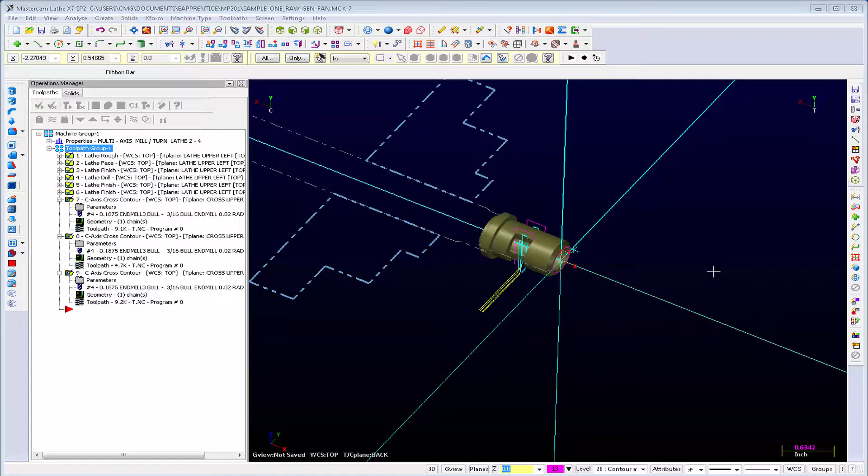In order for this to work, you have to have a post that is set up with the correct post blocks and has the pick-off, cut-off utility enabled. There are some certain options to do that.

My recommendation is that you take the Generic Fanuc 4X MT lathe post and start with that post and customize it if you want to customize a post that uses POCO, because there are just too many things. I mean, you could certainly take some customized post you already have and go through the process of picking out what you need, but there's a lot of structure that's there with command variables and some other stuff that you have to know about how MP works to get it to work in your post.

I know that, for example, this sample part came from one of the students in the class, Josh. I don't think he's here today.

But this particular machine is a Mori, and he was trying to get MP Master to work with his machine. And there were just a couple things that he couldn't really overcome because it wasn't set up the way that our normal generic Fanuc 4X MT lathe post is set up to process the information. And that's really the key. What we're talking about here is using pick-off, cut-off. So let's go through it and talk about it as we do it.

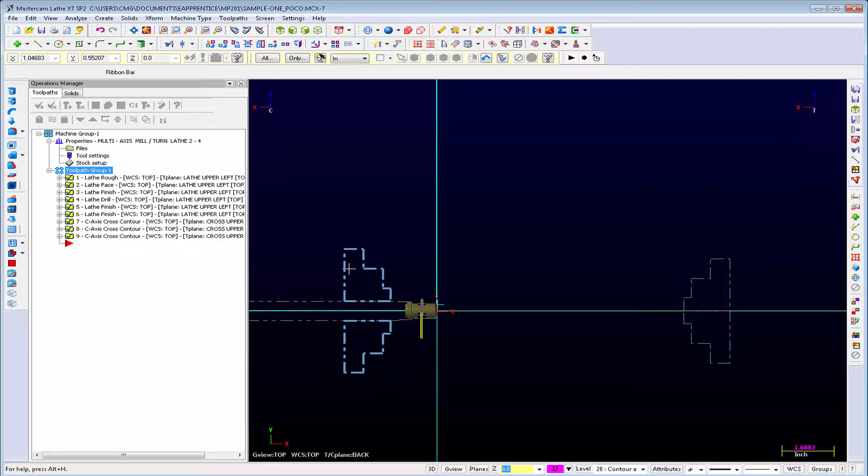In order for pick-off, cut-off to work right from the get-go, you've got to have in your stock setup one piece of stock, either in the left or in the right spindle. You cannot have stock in both. And it's best if you're picking off from the left to the right. There are just more options.

For example, we don't support a bar puller on the right spindle, simply because that's just not the way that most machines are set up. If you've got a bar puller, it's going to be on the left, and your movable spindle is typically on the right. Okay, we have chuck jaws defined on the left, chuck jaws defined on the right, and they're both displayed. Right chuck, left chuck, right stock is turned on even though no stock is defined, and that's perfectly okay.

My point here is that if you have a machine definition that does not have a right spindle or has two pieces of stock defined, one in each chuck, POCO is not going to work. Okay, so here we're starting off and the stock is in the left spindle, and one of the things you can see here on my screen is that the left spindle chuck is shown in a bold line, a really thick line, and the right spindle is shown in a thin line. This is basically showing you the active chuck.

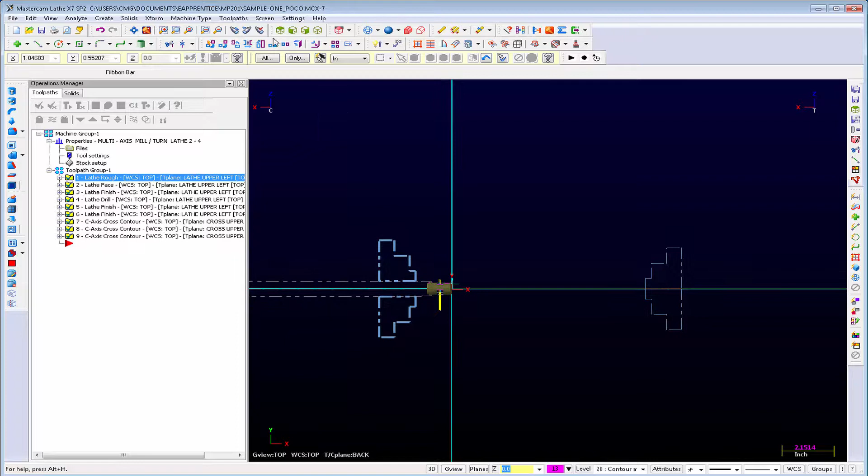All right, so once we start cutting over on the right, you'll notice that that one will be a solid color as well. So here what we're going to do is Toolpaths, Misc Ops, Pick Off, Pull, Cut Off. Now before I click on that, let's study this menu for a minute.

We have at the top pick off, pull, cut off, which is the POCO utility. POCO is just our acronym for it, because it's a pain to say pick off, pull, cut off every time. So the POCO utility is a dialog that walks you through creating a series of chuck operations.

You can move the chuck, you can open the chuck, you can close the chuck, and you can set options. There are some other MISC ops. We have stock transfer, stock flip, stock advance. These are what are known as standalone operations.

So if you do this stock transfer, instead of getting a series of chuck operations, like over here in our ops manager, we have a series of 9 toolpath operations. Pick off, pull, cut off will create a series of tool change, chuck operations, chuck movement operations, cutoff operations if there's a cutoff involved. But basically it generates operations in the operations manager to show the entire process of moving this chuck over, gripping the stock, pulling it out, cutting it off, clamping, unclamping, the whole 9 yards.

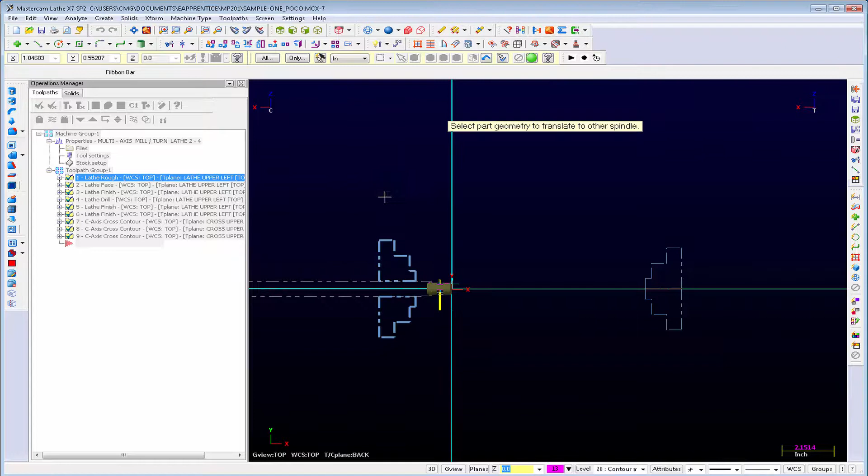So let's walk through the process here. We're going to do the whole shebang. We're going to do pick off, bar pull, cut off. First step here is to select geometry. So I'm going to go into the geometry and I'm going to select the whole thing here. Not only am I going to do a copy of the solid, but we're going to do a copy of all the wireframe as well. So I'll select that as the part geometry that I want to translate to the other spindle.

I'm going to turn on translate geometry. Translate geometry means I'm going to make a copy of it. I'm going to offset all the levels by 1000. So that means all the levels where I had geometry are just all going to be incremented by 1000. We're going to create some views over on the pick-off spindle. What this does is create planes for us.

All right, we're going to create named view. Instead of pick-off spindle, we're going to call this sub-spindle view. Or how about just sub-spindle? And if we want to, we can be specific. We're going to use this for a work offset or something. Sub-spindle G55. Do we want it on the left face of the part or the right face of the part when this part is now in the sub-spindle? Well, that's up to you. Where are you going to set your origin? How are you going to set your origin?

Toolpaths, misc ops, pick off, pull, cut off. What we're doing here is choosing a strategy from the different operations. We can program pick off, bar pull, cut off operations, just pick off, cut off if we don't want to do any stock pulling, simple pick off operation where we're coming over with a piece of stock that's already been cut to length, and we can do bar pull type operations with or without retracting the sub spindle after the bar pull.

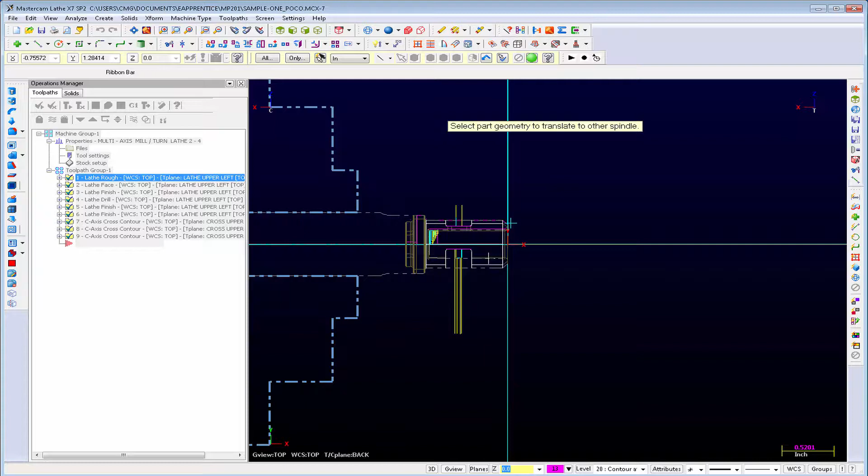So first step in programming one of these types of POCO operations is selecting the geometry. So I'm going to select this solid and that wireframe and select end selection here. And I'm going to choose the option to translate geometry. We're going to choose to translate this and offset it by 1000. All right, so now we're going to say we're going to translate the geometry. We're going to offset all of the geometry's levels by 1000. Basically, it's going to make copies of everything that are offset by increments of 1000.

We're going to tell it we want to create a new plane, a new view for our sub-spindle. And in this case, we're going to use this to set a work offset. We can choose whether we want this generated plane to be on the right face of the part that is now pressed against the sub spindle or some stop, or whether we want it to be on the left face of the part. Depends on how you set your machine. We generally want to tell it to generate pick off spindle stock, because this is going to create a piece of stock, lathe stock, like we see over here.

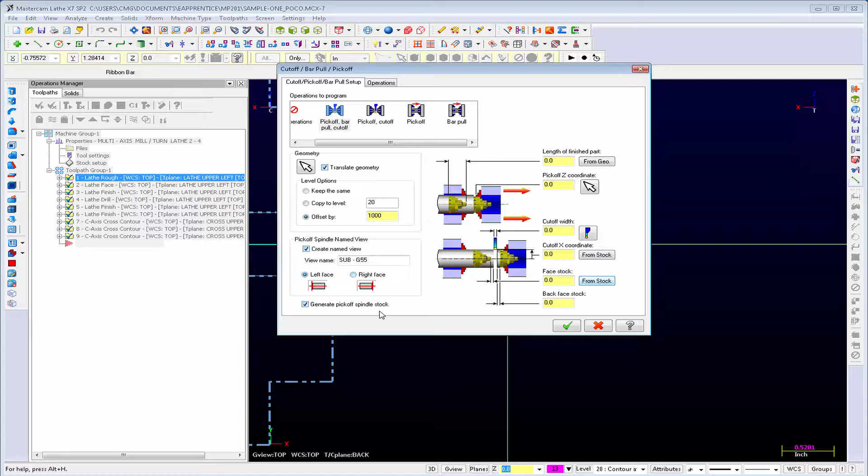And that stock can then be used for stock recognition for your lathe turning operations on the sub-spindle. Now we need to supply some information to the utility. What's the length of our finished part? We can select from geometry, but that's going to include all the geometry here.

What we may want to do is actually go back and click on the geometry button and just grab the solid. Okay, and if we do that and then say from geometry, oh, it did pick that up. Okay. Well, hopefully that is the length of the finished part. We'll find out in a bit.

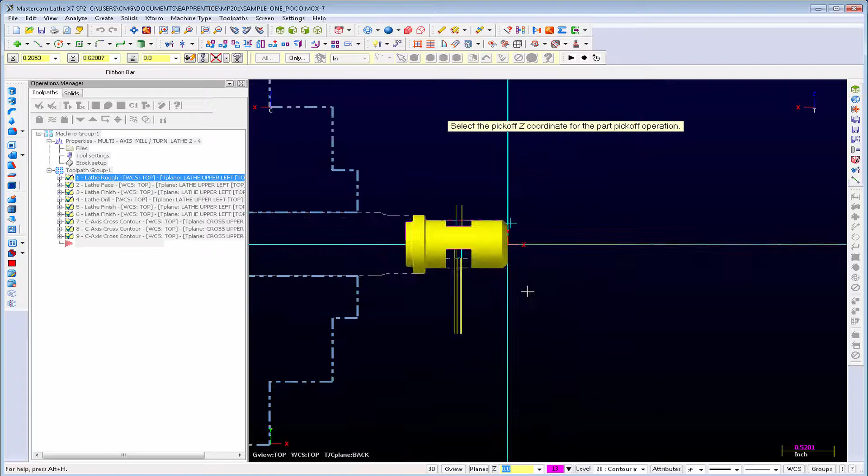Pick off Z coordinate. This is the point on your part where the chuck jaws are going to come grab the part. So generally what I do is use the little arrow button to pick up a point off the geometry. We may want to grab the part here. We may want to go all the way up against this shoulder. I'm just going to pick right here. And that measures from the origin, gives me the point that it's going to grab my part.

Now we need to give it the cutoff width because we're doing a pick off bar pull cutoff. One of the things that we can do is use this tool button to select the tool that we're going to use to perform the cutoff operation. So this is a nice feature because once you set up your tools to do the grooving and parting, it'll be all set for you. Filter.

Now, one of the things you have to be careful of here is what tool you're grabbing, right? Whether it's in the top or the bottom turret. You notice all of these here are bottom turret. We may have to play with the tool and reset it up by the time we use it. Again, grooving parting tools, something 125 narrow.

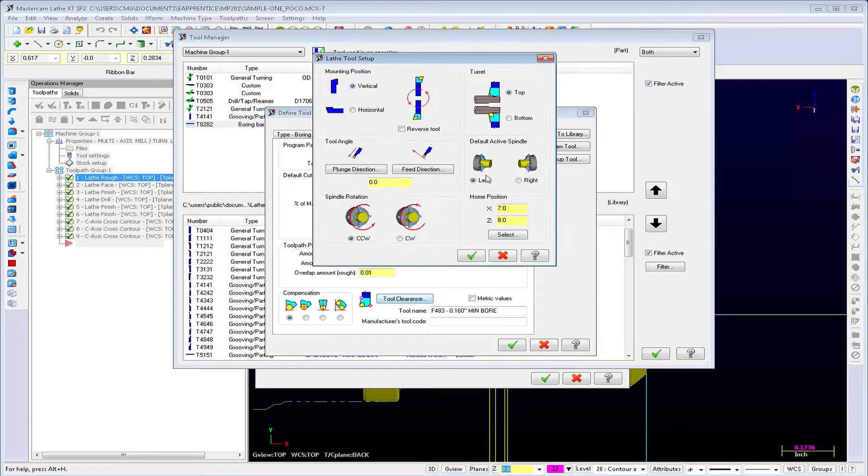Now if I right click on this, first thing I'm going to do is grab this tool and copy it up from the library into my part tools. Then I might edit the tool. Let's make this tool 6. If we do setup tool, yeah, we want to make sure top turret, it's vertical, left spindle, draw tool.

You notice here if we draw the tool, it's shown in a horizontal view. That's not good. Oh, it's probably because I was editing the wrong tool. If I do grab the tool, it's going to give me the cutoff width. So I selected the tool, I think 4141, it gave me the cutoff width.

Cutoff X coordinate. If we choose from stock, it can read our stock definition and it can position it. In this case, we don't have any extra stock on the part. So what we're going to do is just supply it. Basically, this is where do we want to start our cutoff operation from. Let's do a 1.25. Face and back face stock. Do we want to leave any stock here? Let's leave 50 thou on either side.

We've gone through and programmed this section. Now we can go and click on operation. What this operations tab shows you is the series of operations in the order that they're going to be created. So if we click on pre-position cutoff tool, every time we click on one of these options, this has all of the options for each of these operations that we can set.

So if we go to pre-position cutoff tool, this means we're going to take our cutoff tool, rotate to the cutoff tool on the turret, and move the cutoff tool into position in between the chucks. So where do we want it in X? Let's put it at 4 inches in X. Let's get it out of the way of our chucks. We can use any value here, but depending on how we have our tools set up, if we get it too close to one of the chucks, then it's going to warn us, okay? Or it's going to try and crash into it.

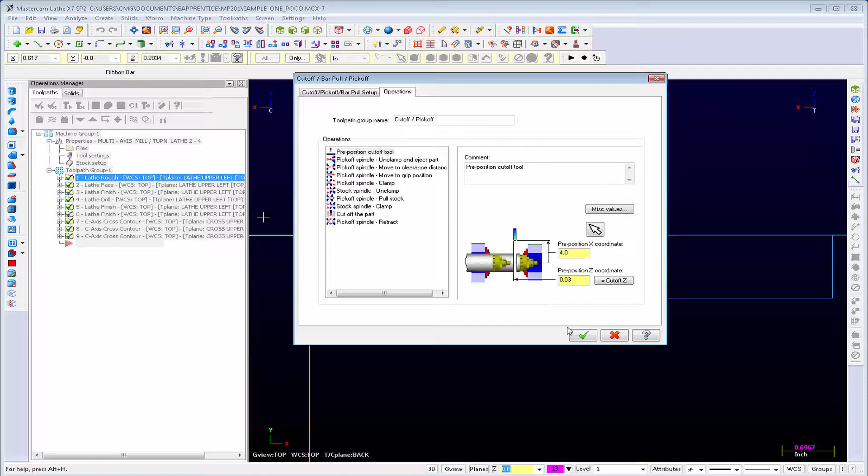Pre-position Z coordinate. If I click on equals Z cutoff, you notice what we get here? It automatically knows, based on the amount of stock that we're leaving and the length of the part, where to put the tool so that after we do our bar pull, it's in the right position to cut it off. We can also give it our own position if we're not satisfied with that. So if we want to type in a position, we can do that as well.

Pick off spindle. So what's going to happen here is over on the sub spindle, we're going to unclamp and eject the part. We can set a comment. We can tell it not to post-process the operation if we really don't want this to come out in the code. And for this particular operation, we can set custom parameters. What would we want to set here?

Some of the default options that we have are reposition mode, whether we're in rapid or feed rate, clamp, unclamp, dwell time for the chuck, feed rate amount. So if we're in feed mode instead of rapid, what do we want our feed rate to be? All the rest of these miscellaneous integers and miscellaneous real numbers are available to us.

So at this stage in the sequence of operations we're performing, if we want to turn on some options, say we want to turn on M288 or something, and that is going to rotate both chucks for 3 seconds to spin off coolant or chips, and then we want to do M416 because it activates some sequence on our machine. That's what we would set these miscellaneous integers and miscellaneous real numbers up to do, and that's what we're going to do during class. So all of these operations have custom miscellaneous parameters that we can enable or disable.

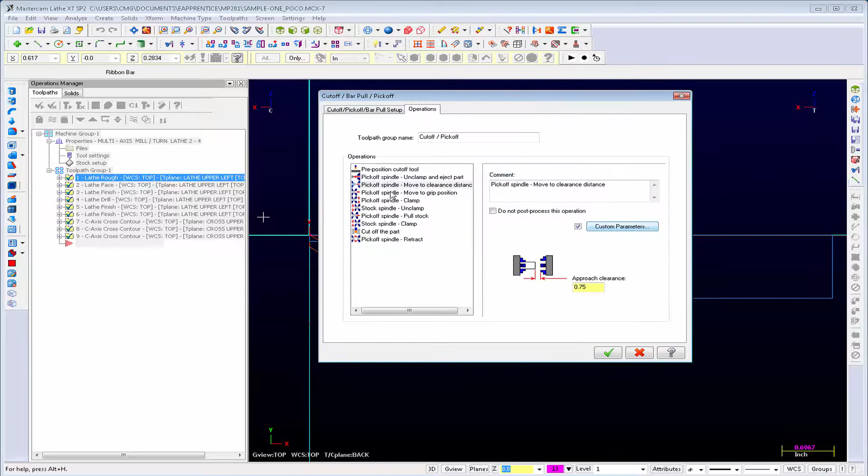Now it's pick off spindle, move to grip position. So after we've gone to the clearance distance, this is going to be moving us into the grip position. I'm going to go custom parameters, feed rate, so we're going to hit 1, and feed rate amount is going to be, say, 35 inches a minute, whatever value you want. Now we go to pick off spindle clamp, and I'm going to go into custom parameters and say I want this to dwell for 1.5 seconds. So I'll put in a dwell amount.

Now we go stock spindle unclamp. And you know what? Here I want to dwell, but I only want to dwell for a half second because my unclamp's way faster. Now we're going to go pick off spindle pull stock. So again, this is a stock pull operation. We're going to do it at feed rate, and we want this to pull at 60 inches a minute. Stock spindle clamp. So now my main spindle, since it was unclamped for the pull operation, is going to clamp. And once again, I'm going to dwell, this time for 2 seconds.

Now we're going to cut off the part. So this is showing us from our operations library, lathe-inch.operation7. It's got this cutoff tool, and we can either select our own tool, or we can use a tool from the operation. So you can have an operations library already pre-set up with multiple cutoff operations, and you just grab the operation you want. So we've got a bunch of different options here. It's kind of up to you. So if I say I want tool 4141, I'm going to use that tool.

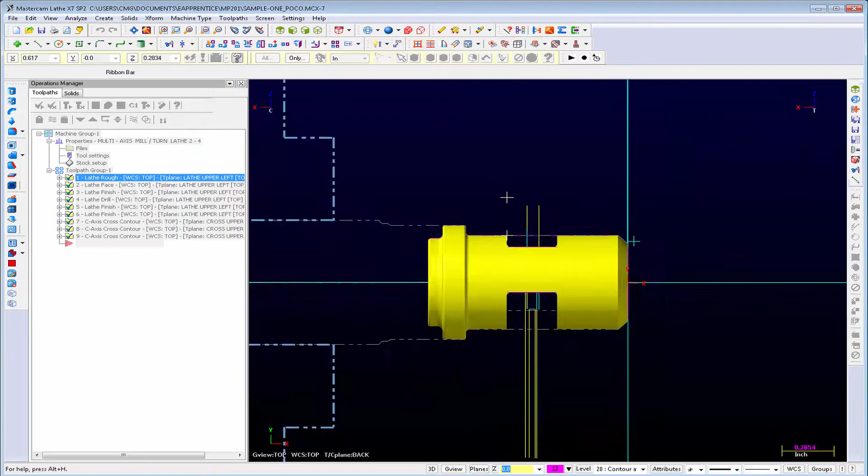Oh, did I get caught here? Oh, I got caught. All right, hold on. So I tried to mix too much stuff in there. I tried to have it go and draw the tool. I shouldn't have done that. So I'm going to go back in. We're going to run POCO again. Give me 1 sec here.

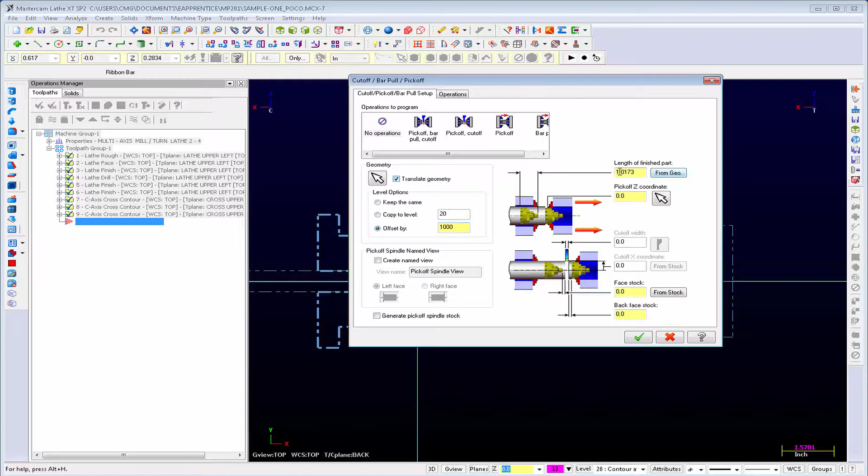Okay. Let's try this one more time. We're going to do toolpaths, misc ops, pick off, pull, cut off. I'm going to select the geometry, in this case my solid. Say translate the geometry, offset by 1000. Length of the finished part, I'm going to click on from geometry, so it's going to interrogate the solid.

Pick off coordinate, we'll pick off from there. And we're going to leave some stock on either face. Going to grab the tool, gives me the 125, X cutoff coordinate, we're going to do 1.25. And then in the operations, we're going to set up these values here.

So move to clearance distance, we're going to give it the clearance distance 0.75. We're going to do that at rapid. Move to grip position is going to be done at feed. Clamp, we want to dwell. Unclamp the main spindle. We're going to dwell again. Pulling the stock. We're going to do that at 60 inches a minute.

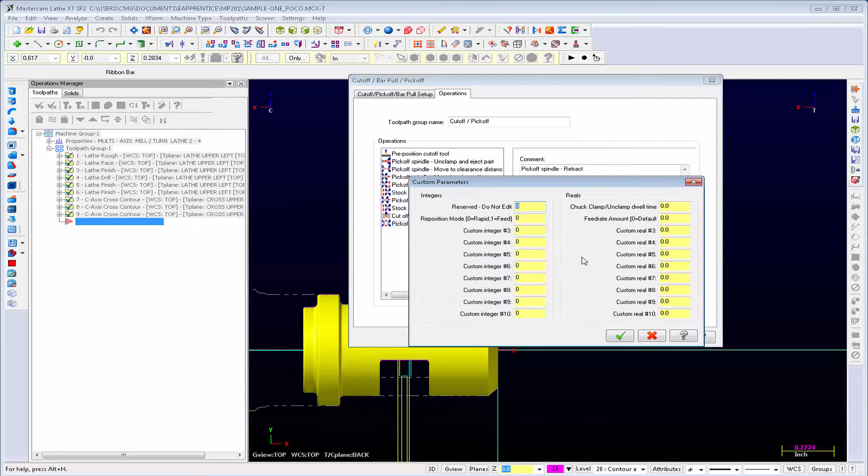Clamping. Let's clamp again. Cut off the part. We've got a tool selected. And pick off spindle retract. We're going to do that at feed, but it's going to be at 200 inches a minute. Okay. Click OK. And what happens is we generate all those operations. So here, with the arrow at the end, is after all of those ops have completed.

If we go in and select all these operations and do backplot, oh, hold on. I'm going to grab the arrow, bring it up to the top here, and now we're going to go to backplot. So what happens is we start stepping through here. We position our cutoff tool. In this case, the tool's on the bottom because it's set up for the bottom turret. I'm going to go in and fix that.

So here you notice what we created was a lathe point operation to pre-position the tool. We have a lathe chuck operation, several lathe chuck operations, a lathe cutoff, and a lathe chuck operation here. If I just leave all this as is here and start trying to modify my tool, it's probably going to screw me up here. So what I'm going to do is just select all these operations and delete them.

Let's delete all that geometry over there. And we're going to delete that group as well. I'll save that. And we're going to run this again. Before I do that, what do I got here that's going to be a problem? Anybody see it on my screen? I got something that's going to give me a problem if I try to run pick off cutoff. Stock and sub, right? Stock, yes, correct.

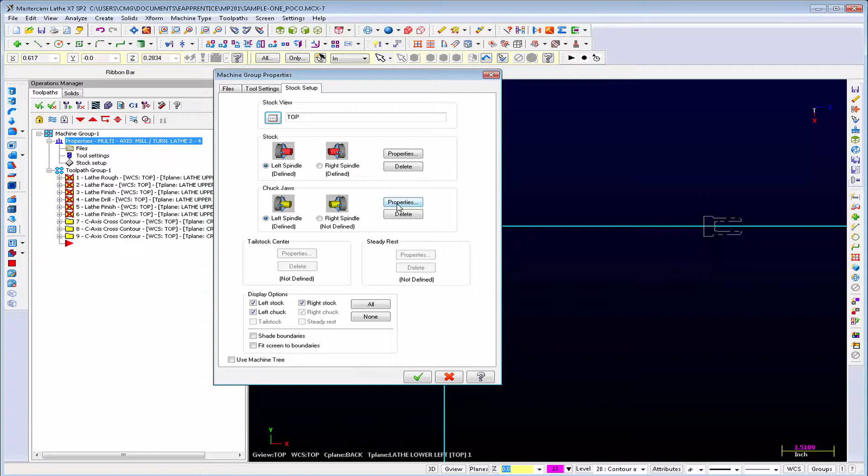So I'm going to go back to stock setup, right spindle, click on the radio button here, and then delete. Oh, I did not want to do that. Hold on, I'm going to grab this. I deleted the wrong thing. Sorry about that. I want to delete the stock, not the chuck. Important difference. Right spindle stock, delete. There we go. Okay, save that. Now let's go through and do pick off, cut off again.

Pick off, pull, cut off. Now look what happened when we came back in here. It remembered the settings that we had last time. So we are going to do geometry, that guy. Yes, we are going to translate the geometry. We're not going to create a named view because we already should have one. We are going to generate the pick off spindle stock. All this stuff stays set up the same.

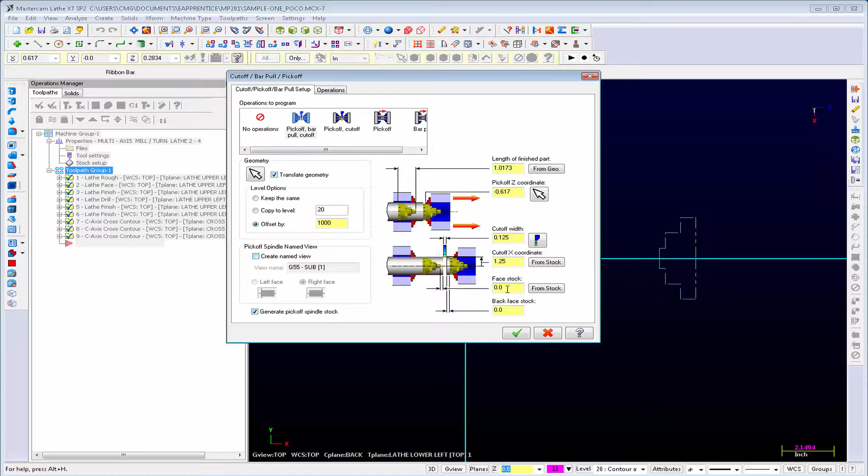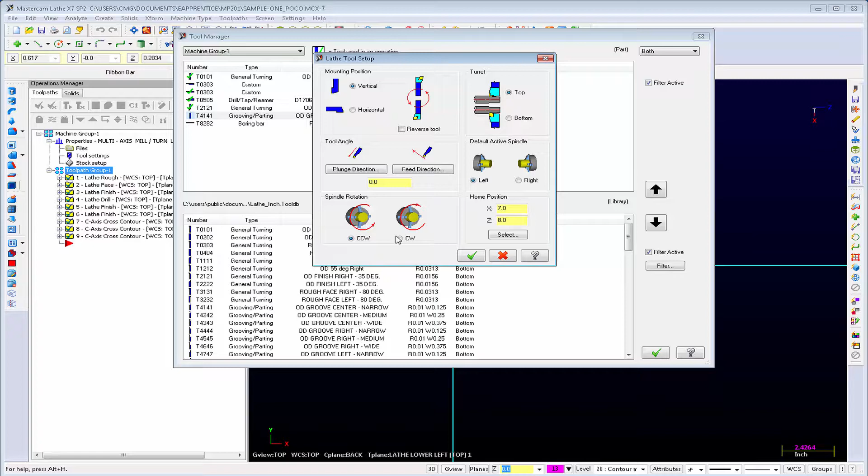Before we get into this though, we do want to do one thing. Sorry about this. We want to go fix our lathe tool. So we want to take this tool right here, right click and say setup tool. This is going to be on the top turret. It's a vertical tool. It's on the left spindle. Okay, and right now we're going counterclockwise. If I go clockwise, you notice that it changes it.

So I also want to do draw tool. Okay, so this is the tool that we're using. It's now set up the correct way. So we can do toolpaths, misc ops, pick off, pull, cut off. Make sure we're on the bar pull.

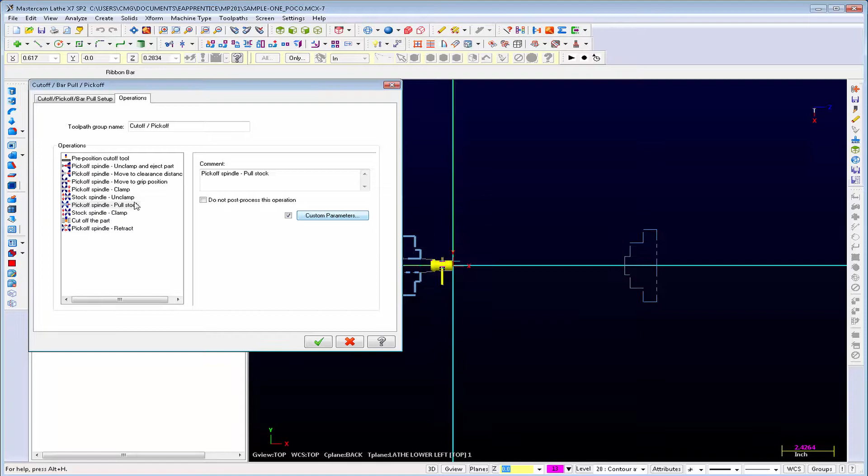Okay, pre-position, that's all still set. Unclamp and eject parts, this is set. So remember how when I first did this and it didn't generate, I didn't get any of these things saved? That was because I was trying to draw the tool and do a bunch of stuff in the background. Once you go through and run this, it remembers all your settings, which is really handy because then I don't have to go in and fill this out every time, right?

It remembered all that stuff and I just make sure I'm set up to do it right and I hit OK and it does everything for me. So here's all my pick off, cut off operations. Let's backplot them. Okay, and what you see is it starts out and it pre-positions the cutoff tool.

Where are these values saved? There is an XML file that gets saved as part of the pick off, cut off process. I can't remember if it's a .transfer file or if we do something else with it. I'll have to ask Michael because I'm not exactly sure. What I was told was don't worry about it because it's really hard to understand and you can't edit it. So I don't know if that's true or not.

I'll have to do some digging around to find out, and I'm not sure if you can even have multiple of them. So if you have more than one, it might screw it up. You notice there is no real option on the interface to select a custom one. When you go in and you run pick off, pull, cut off, you only get like no operations, pick off, bar pull, cut off, pick off, cut off, pick off, bar pull.

So you may be able to have multiple .transfer operations files and swap them out of the directory before you start this up, but I'm not sure. I know, for example, if you do the cutoff, you can come in here and you can have a library of cutoff operations. So that may get you what you need if all you want to do is be able to swap out the tool on the fly and the position of the tool, something like that. I don't know. But yeah, again, I'll have to find out.

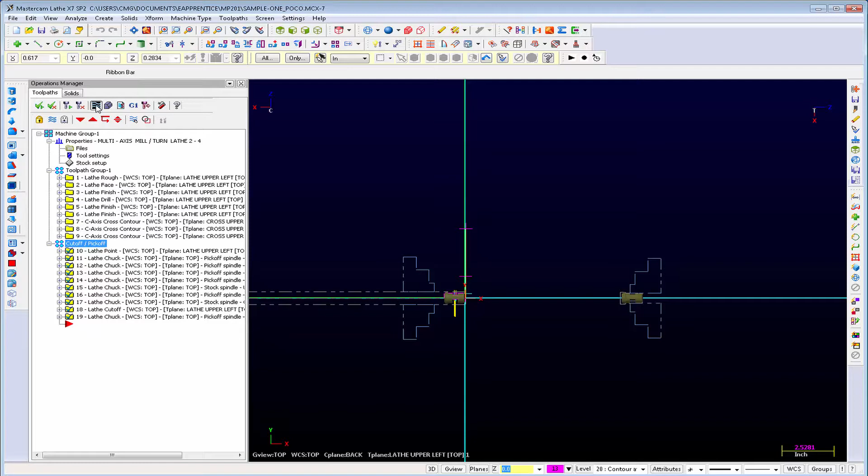So here we'll do backplot again. I'll hit step one time. Oh, hold on. I'm going to move the arrow to the end of these operations here, and we'll do backplot. So the first thing that we do is we position the cutoff tool. And what you have to be aware of is there are some things that you'll see in backplot that won't happen on the machine. So for example, with this point operation, the way that these operations are written in the NCI file, we would have a position to go to the point operation, and then it would have a retract back to the home position.

We go into the post and we suppress that retract. And what that allows you to do is it says, oh, we're in the middle of the pick off cutoff. We just positioned this cutoff tool here. We don't want to let the tool retract. We want the tool to stay there, and we want to let the chuck come in and approach the part and do all the moves. So just be aware of this. This is really important, that you may see some things that happen in backplot, and you're going to have to check the code and realize that, okay, that retract that we saw was suppressed.

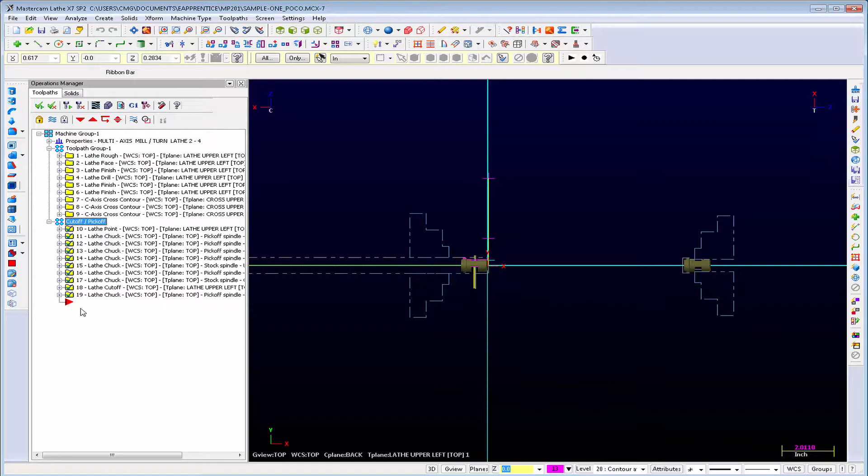Okay, so I'll step again. So that retract, by the way, didn't happen. Let's see, come on. Okay, so we're gonna try this again. Go into backplot, step, that brings our tool over. Okay, now at this point, what we need to pay attention to is the chucks and the stock and not worry about the solids, because the solids are independent of what's really going on here. At this point, we have unclamped this chuck over here, and this one is clamped.

Now we hit step again. And notice that we've now gone to our approach distance. Okay, hit step again, and now we go to our grip point, hit step, and we've clamped onto the part. We've unclamped the main spindle. Now we pull our stock. Okay, so we've pulled our stock out.

You notice that we're showing this tool reapproaching here. This tool never had to reapproach. It was there the whole time. But there's just some limitations in backplot.

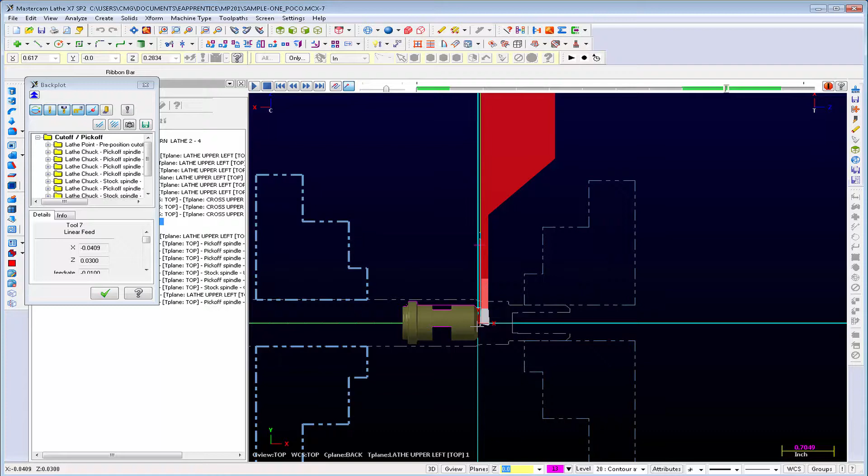So now we come to the start of our part operation. Why? Because we told it to go all the way up here. I told it something like 1.25 for the point that we wanted to part from. I could have given it a point down here, but I wanted to make sure we had enough clearance. And these are all things that can be adjusted, of course.

So I've fed into the part, I've done my cutoff, now it's going to retract, now the tool is going to go home. Okay, and even though it's not quite showing it right, the final thing that happens is the retract. Okay, so where did it retract to?

Anybody got a guess? It's a good guess, Corey. Right chuck position, yes. And the right chuck position is defined in stock setup. So when we define our right spindle here, this is the place that it's going to retract to. So just be aware of that.

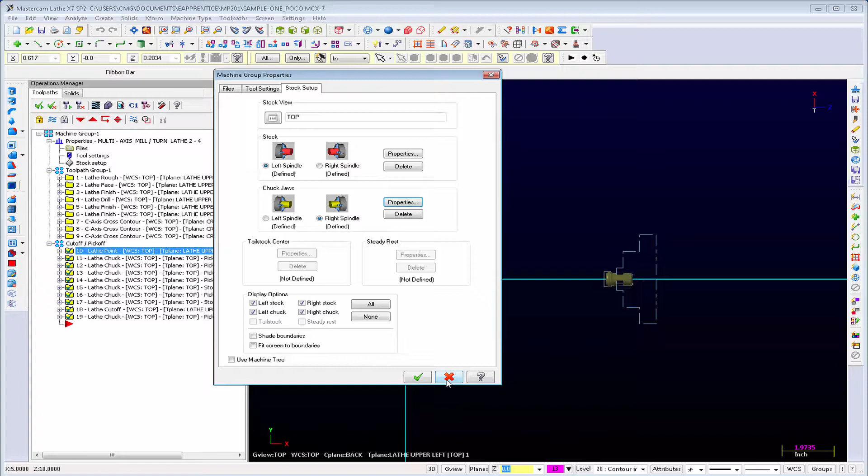If we've got a machine with 60 inches of travel, but we're working on a real small part, we may want to set it up so that, here, if I look, that's where it retracted to. So it retracts based on the setup values that we've got.

Now, we can certainly set this up as far as programming a pick-off, cut-off sequence of events. We can set this up to allow you to output an override position if you want for your sub-spindle axis. And it depends. Some machines it's a B axis, some it's a W. For some it's C2B or something like that. Whenever you're programming the C operations, they're C2, and then driving this axis here is B. So it just depends. So let's look at what we output if we just post this out right now.

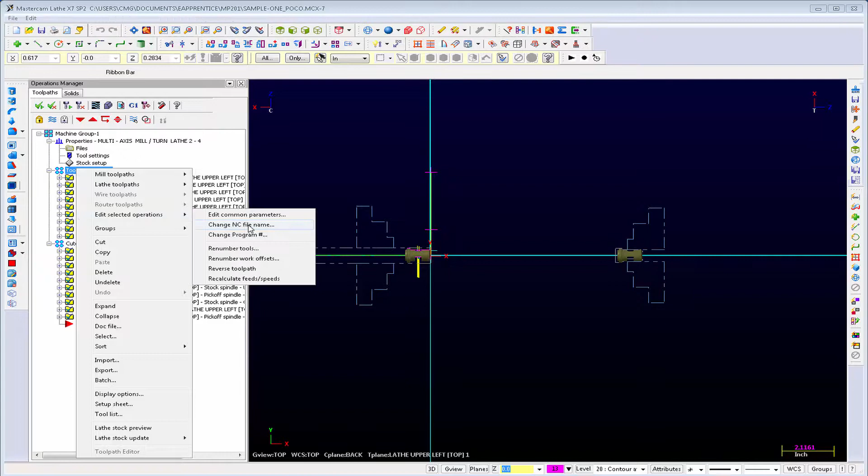Okay. Hold on a second. Let's make sure. And let's close that. Okay, so these are our lathe operations. There's the bull end mill cut. Here we are pre-positioning our cutoff tool. Let's blow this up a little bit. So here we're pre-positioning our cutoff tool. We're moving it into position.

Now we're doing pick off spindle, unclamp, and eject part. So you notice we're getting our M210. We're getting our dwell value. Now we are pick off spindle, move to clearance distance. So here we're rapiding to B.75. Then we're going pick off spindle, move to grip position. So G1, B minus 0.617, F35. That's what we told it.

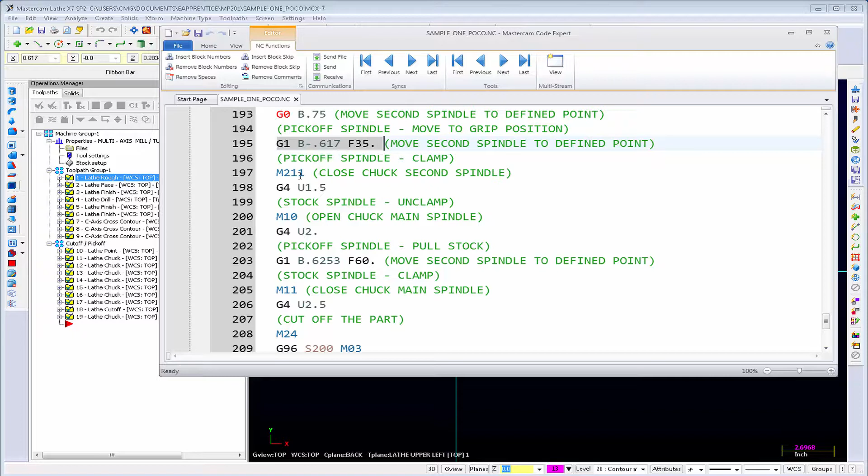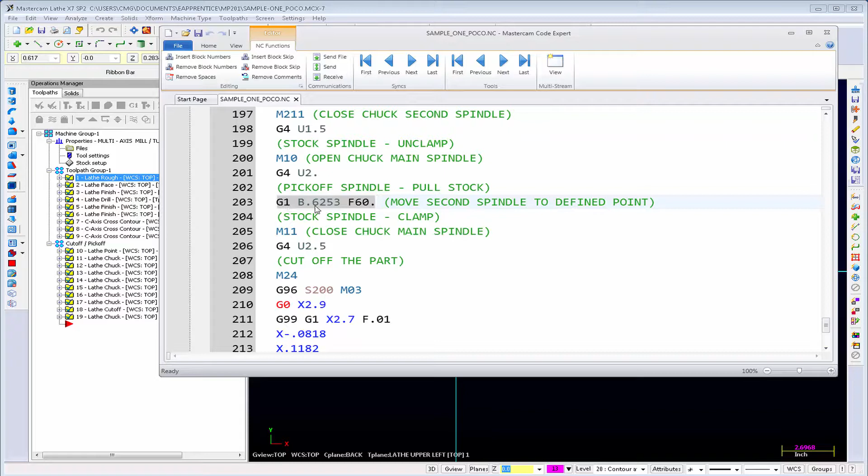Clamp, and we're getting our dwell. Unclamp for the main spindle, we're getting our dwell. Now we do our pull stock. So we're positioning B to 0.6253 at 60 inches a minute. Now we're clamping and dwelling. Now we're doing a cutoff.

So now we're enabling our cutoff tool. We're rapiding to our diameter position. Even though we told it a radius, it goes to a diameter output. Now we feed in, feed to the center, feed back out a little bit, and then rapid back out, and then rapid into our safe position, and then go home.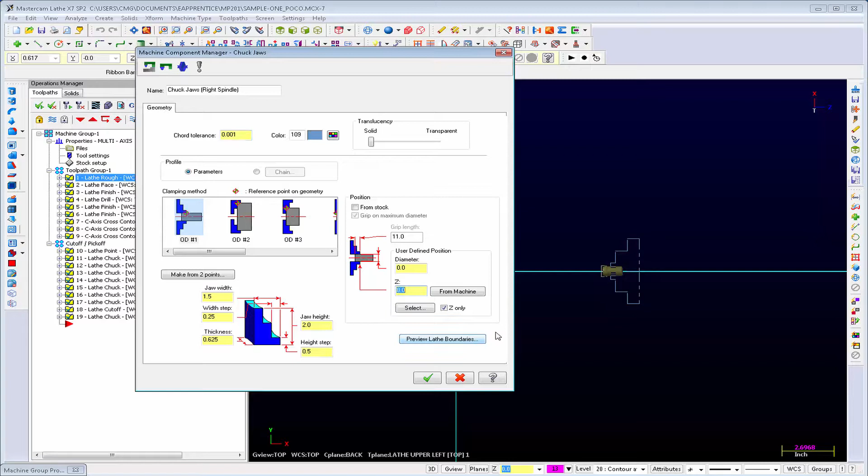And then finally, we retract the spindle to our B 8-inch position. And again, that position came from right here. So, what post blocks does it use? Let's take a look at that.

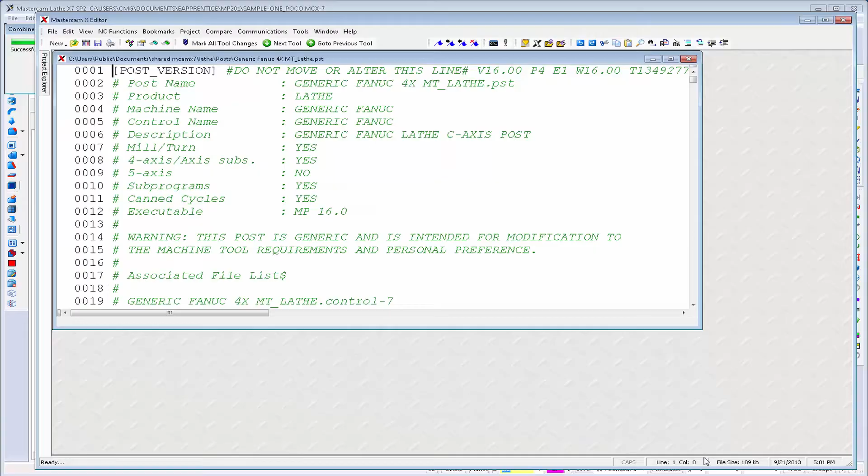Is there a way to home the cutoff after sub return? Sure. Yeah, we can override kind of all of this stuff, Corey, which is some of the things that we'll be doing. So let me go back in there. Let's repost that real quick so we can look at the code. I think I closed it. Oh, yeah, I was in Code Expert.

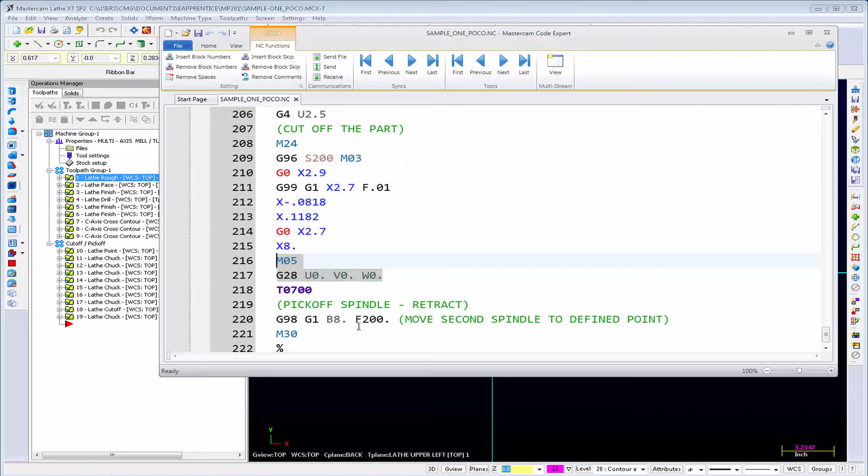So what we've done here is we've finished the cutting here. That's the retract point, and also the start point, I believe. And then we've got this home move for the tool. This comes from PL retract and P tool end. So what we need to do is save or suppress that retract until after POCO is over. So how do we know when POCO is over? Well, that's something that we have to add to the post to be able to find out.

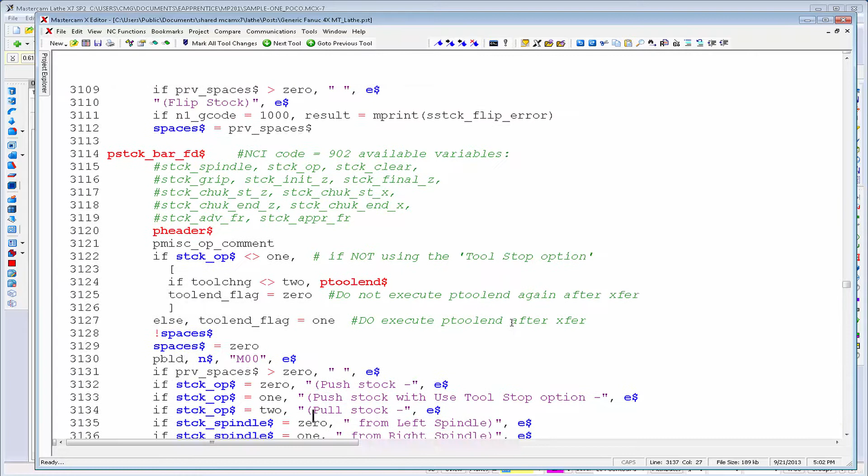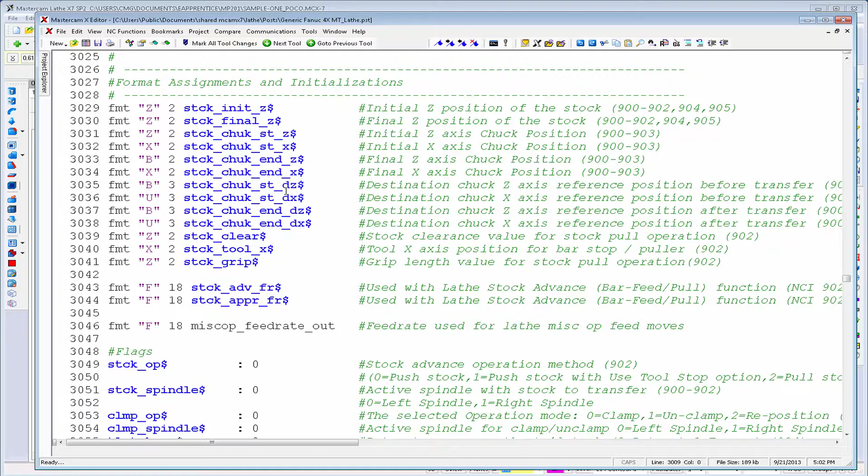So the place where a lot of this processing occurs starts down here in a section called V9 plus MISC ops section. Okay, and there are a bunch of variables that are initialized that get used as far as chuck, start and end positions, final positions, stock clearance, all kinds of stuff. And we have P stock transfer, which is that individual stock transfer op here.

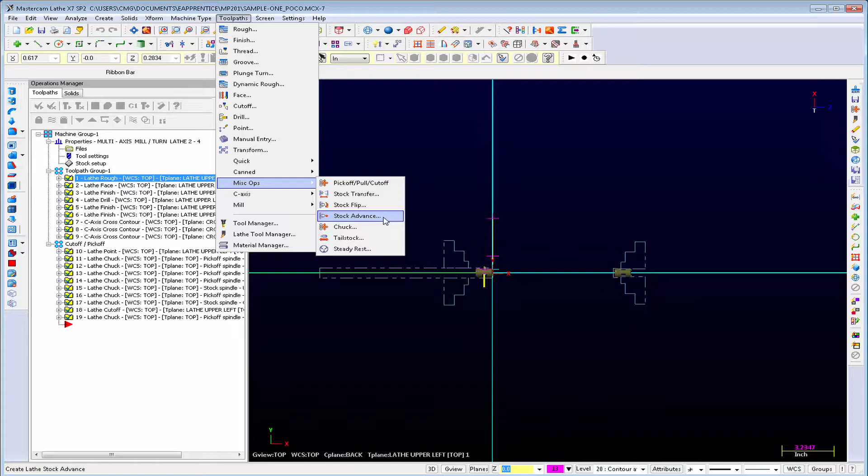P stock flip, which is the 901 code. So NCI G code 901 is generated from stock flip here. Stock advance, any guesses on what the G code might be? If this is 900, this is 901. Any guesses? If you guess 902, you're right. So stock advance bar stock feed is 902, and P chuck is 903.

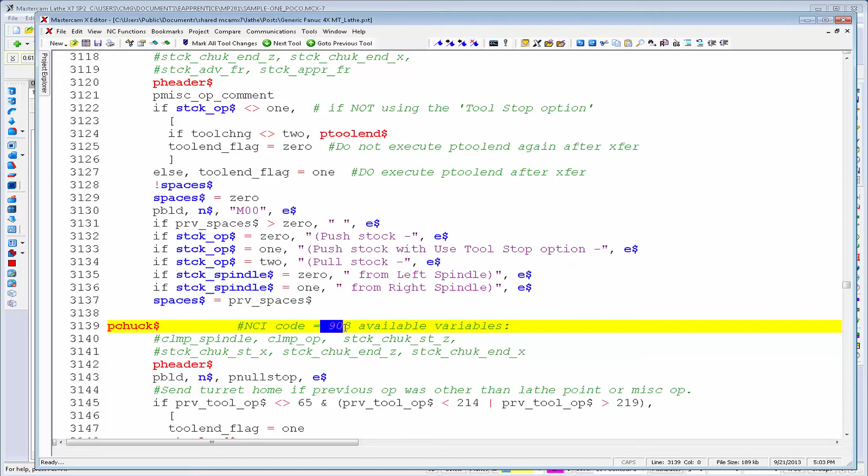So the thing about this that makes the Poco so much more powerful than just the standalone operation is that instead of one operation, you've now got, I guess we can count 1, 2, 3, 4, 5, 6, 7, 8, 9, 10 operations that get processed in order. And the important part there is the in order. Because we're writing multiple NCI 903 codes, the order in which we process them means the order in which we're going to hit here,

which means that we can set individual options in each of these miscellaneous integers and miscellaneous real numbers section. And by doing that, by having control over those misc ops, we can do anything. Any kind of motion that you want it to perform or any kind of code that you want it to output during this sequence of events, we can do.

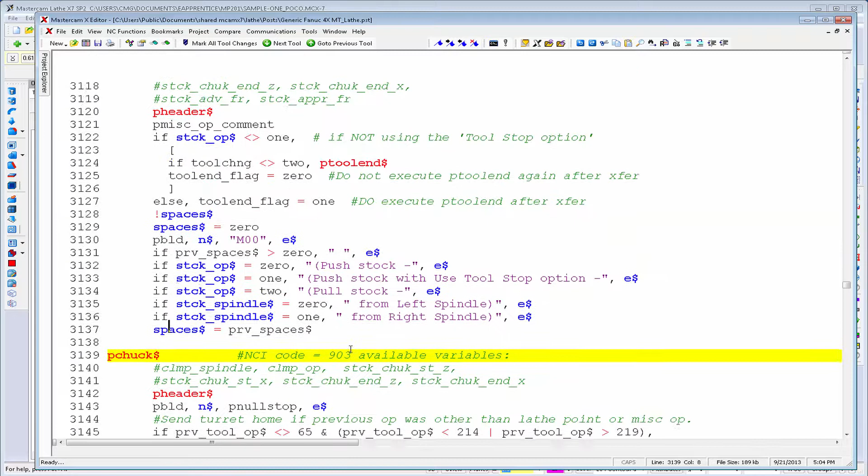Okay, so these are the ones. I want you to look over these post blocks on your own. I want you to read through and see what it's doing and see if you can guess about some of the things that are happening. We're going to look through this all in depth together and modify a bunch of these options. But this is really where the magic starts to happen, is in P chuck.

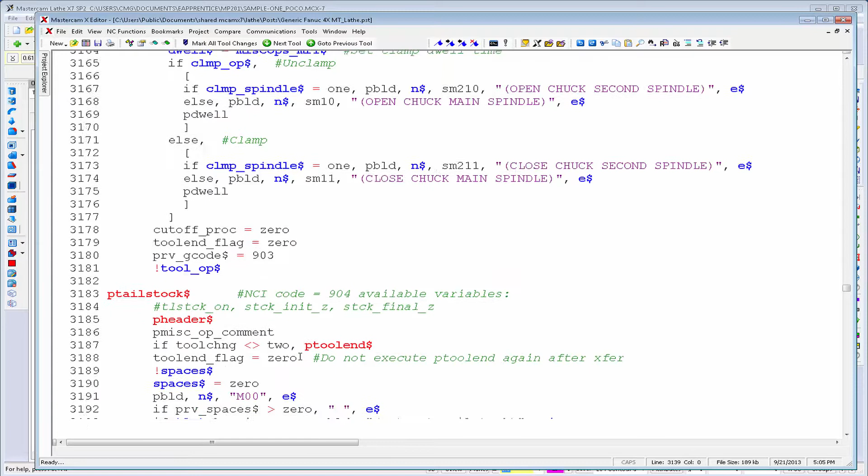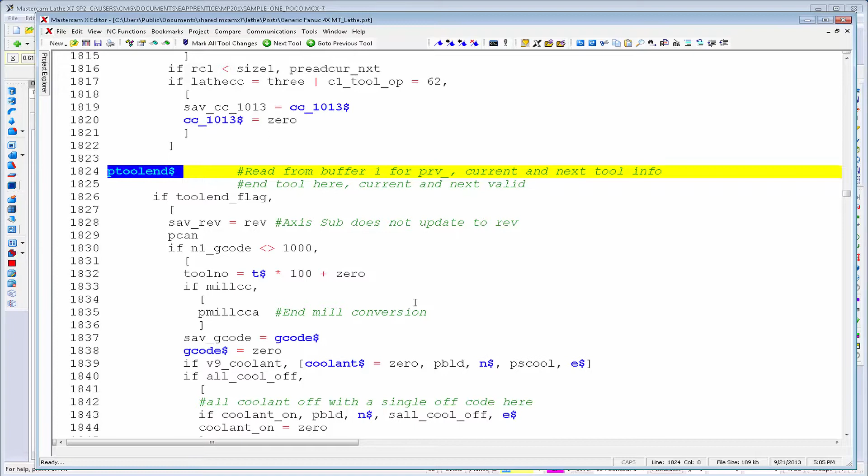So, what were we talking about? We were talking about, is there a way to home the cutoff after the sub return? Yes. Where we're looking is a post block called P tool end. So P tool end gets called at the end of every tool change event. And based on the settings, we're going to end up calling either PL retract or PM retract.

In PL retract, this is where we're getting our home position. And so what we're going to need to end up doing is setting some flag variables. And a flag variable is just a numeric variable that you use to indicate a state. And with that state, we're gonna determine, are we in a series of pick-off cutoff operations, or have those pick-off cutoff operations ended?

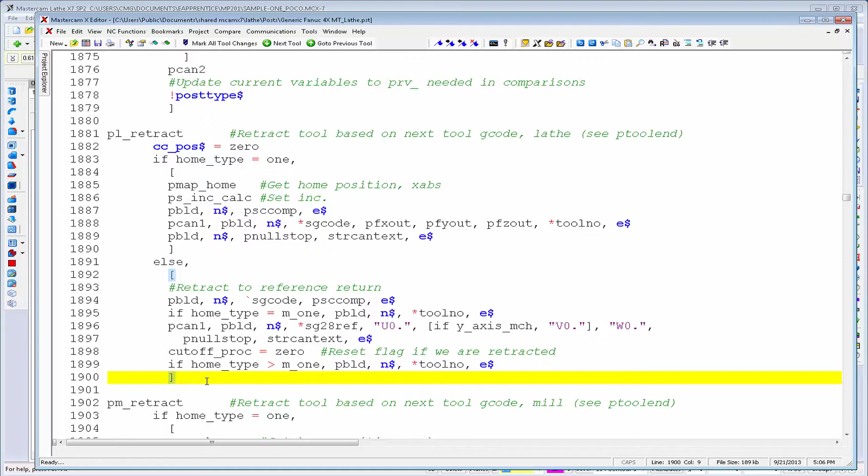We got a question from Tony about P chuck. And he says, why is there a call to P header? There's a call to P header in case you want to start off your programming with Poco and then do some cutting operations. So if you want to start by grabbing some stock, pulling it out, doing a cutoff, and then maybe you're going to turn on both spindles or something like that, it allows it to process and to include the header beforehand.

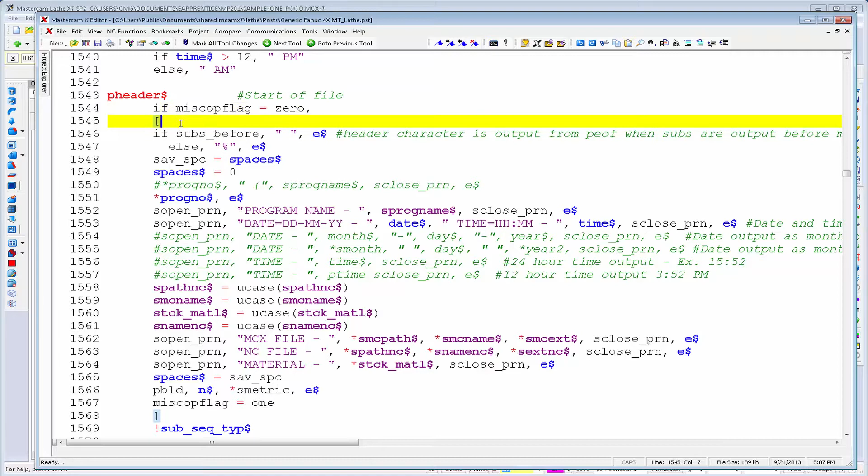Now, if you go and you look at P header, you'll see that the entire P header post block is wrapped in an if condition. If misc op flag equals 0. So what you can see is that if we go into misc ops and misc op flag is equal to 0, it will allow you to output the header from the first instance of the call to P chuck. Because you'll notice at the end here, misc op flag equals 1.

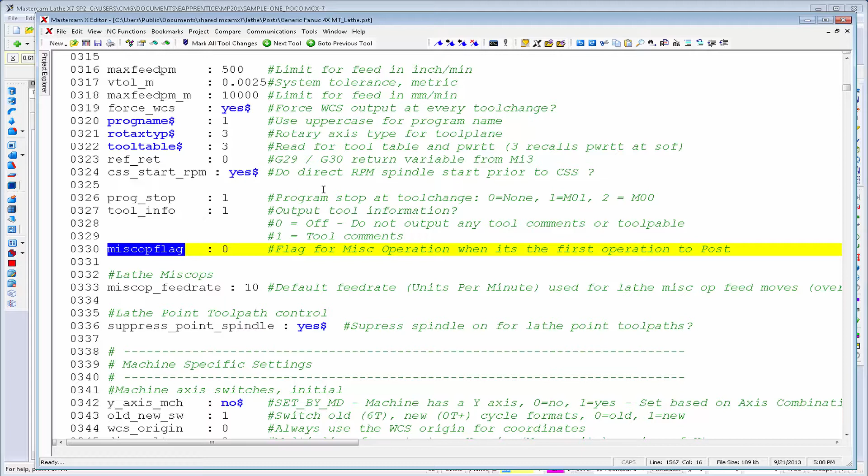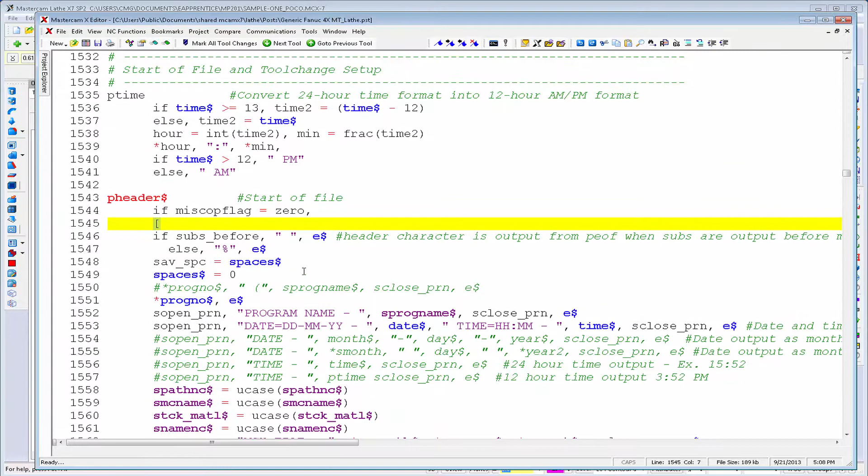Okay, so we've got some stuff in there, and then if we look at misc op flag, you'll see that the call to P comment is from manual entry, and so it says if misc op flag equals 0, call P header. Okay, so anyway, it's a way that we can get header output if we're using POCO as the first operation.

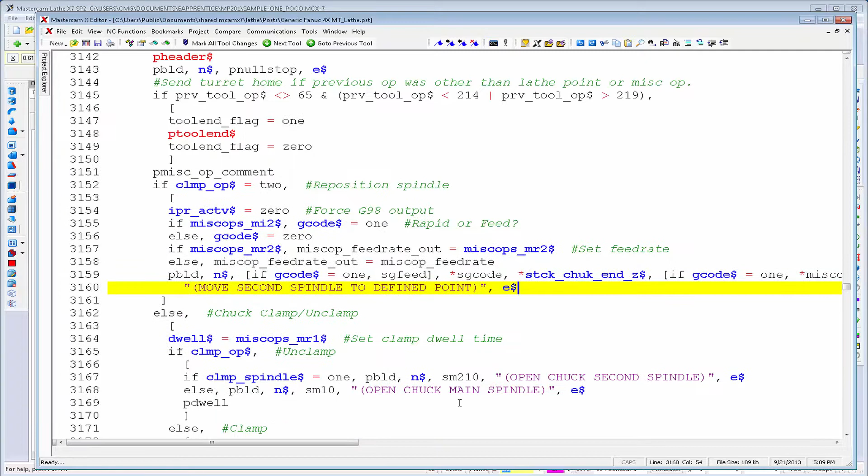So back to P chuck, we can use conditions in here to determine when we allow retracts and when we don't. And a lot of the times what we're doing is basing this off of the variable tool op. Tool op tells you specifically what type of operation we're processing, whether it's a chuck operation or a lathe finish or a point or a cutoff. And the tool op code for chuck operation is like 215 or something like that.

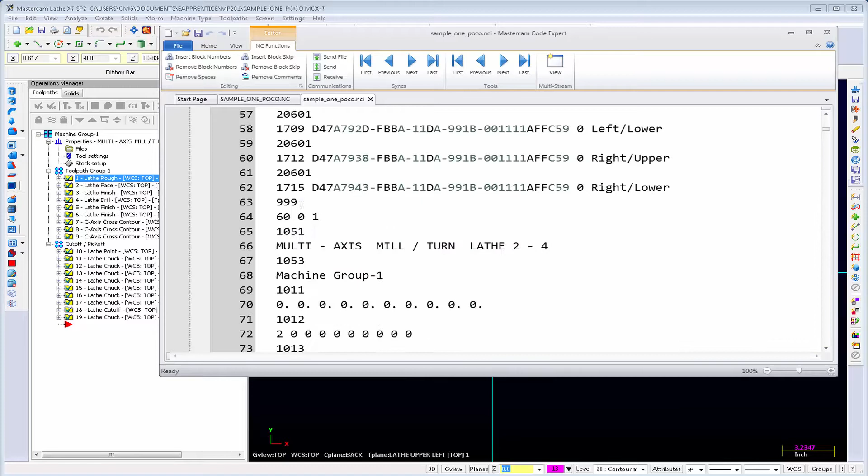Anyway, we can use some code to suppress that call to send the tool home before we've finished the chuck operation. Now, if we look at the structure of the NCI, there is an NCI line that's really important. And it's going to be written for every operation as it's processed. And that line is NCI line 999. So we're going to go look that up in the documentation.

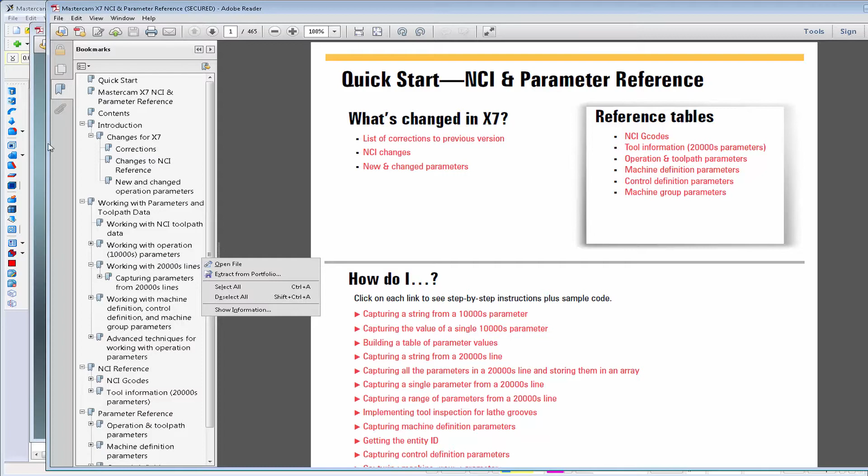And we're going to go to the X7 NCI and parameter reference. Make sure this gets in the window here. Oh, actually, I'll just go to NCI G codes. And we want 999. NCI G code 999 is the start of operation code. It's what lets MP know that we are now processing a new operation.

There are 3 variables on the data line for the NCI 999. The first one is sync_tool_op, which takes the same value as tool_op, but allows you to access that value earlier in the NCI read loop. So sync_tool_op grabs the same values as tool_op, and tool_op's a very important one. We have our sync stream value in case we're writing out multiple streams of data. We know which stream we're writing or which stream we're reading from.

And then we have the op ID, which is normally read from the 1016 line, but now we can take the same value from op ID and it gets copied to sync op ID. And this allows us to have these tool op and op ID values at the very, very start of the operation, which is pretty important. Okay, so sync tool op and sync op ID can be read right at the start.

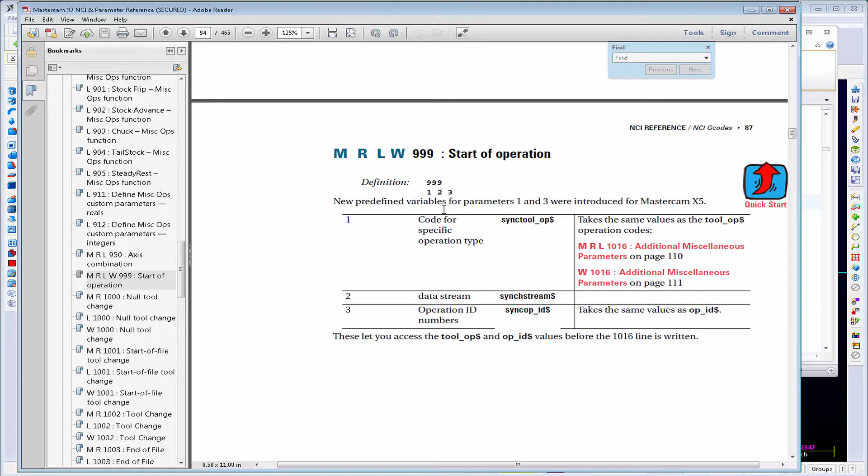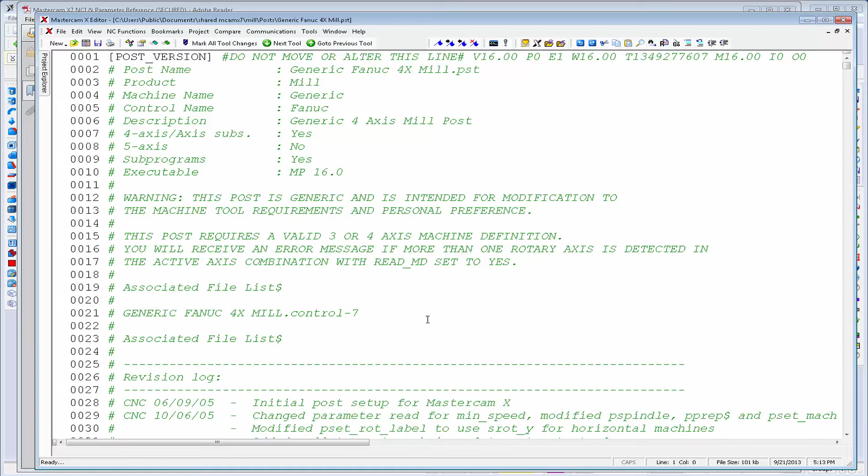Now, when we're looking here at those 999 codes, by the way, 999 calls in the post... thought we had a sync in here. Guess not. Might not be used in this particular post, but pretty sure I know a post where it is. Oh, that's called by the 950. Sorry, I thought it was called by P999. But anyway, if we look back at P-Chuck,

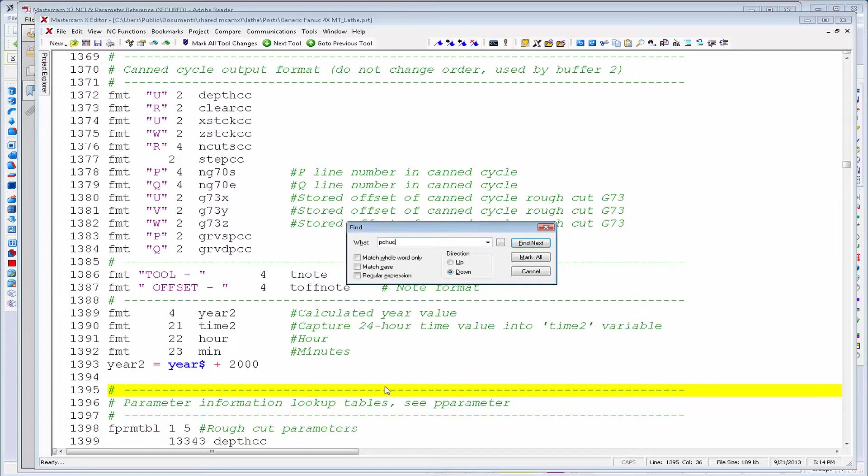there is an undocumented post block that we can use that makes our life a whole lot easier when we're processing pick-off, cut-off operations. That post block is pmiscop_999.

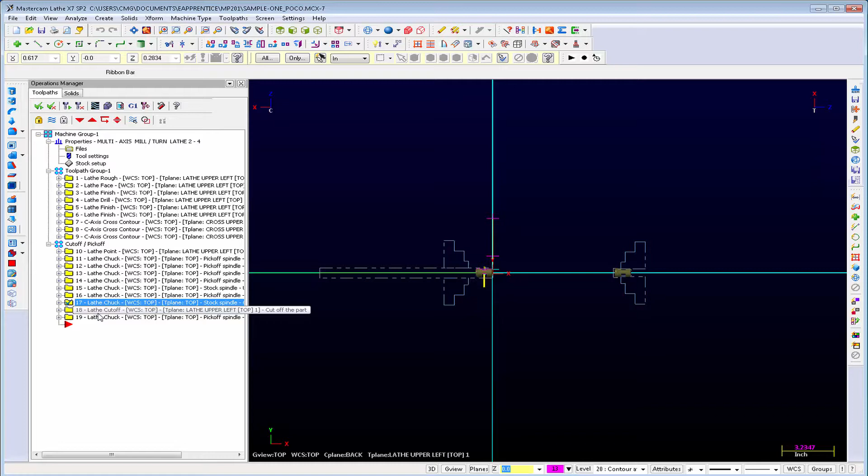pmiscop_999 is a post block that gets called at the start of every POCO event. So anything in here that was generated as part of pick off cutoff, pmiscop_999 will get called before the start of this op, this op, this op, and this. So the important thing here is to show what happens and how we can use that as a flag. So let's do this. Let's start another group. Call it sub. And back here on the sub spindle,

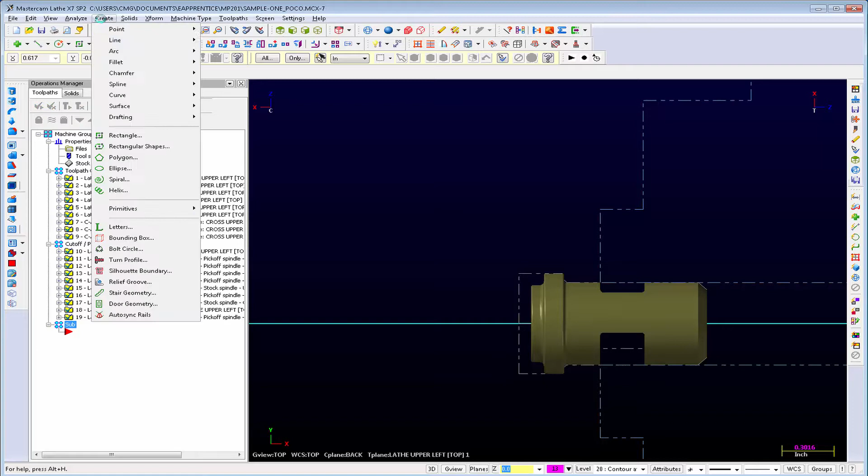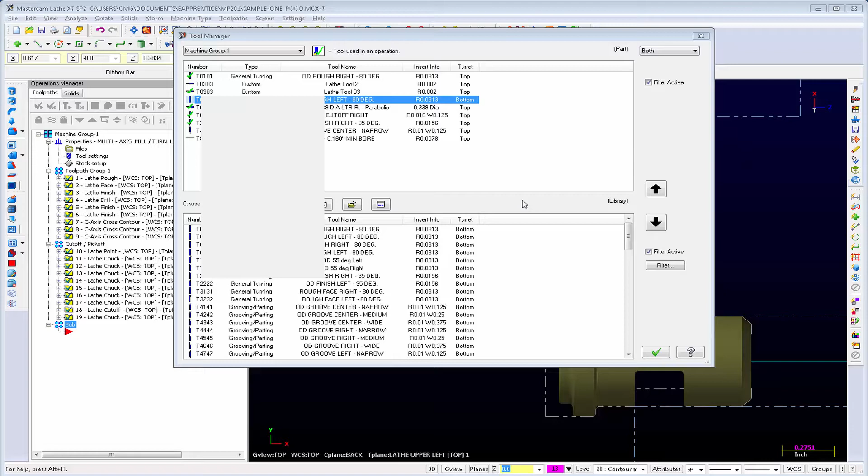okay, now we got some geometry, tool paths, lathe tool manager, and we're going to get, let's see. Set my delay there, and we're going to edit tools, setup tool, top turret. It's going to be a vertical tool, right spindle. Again, if we're on the wrong hand, we need to go in there and flip holders. That looks right. Draw tool. That looks right. Okay, so we've set up our tool.

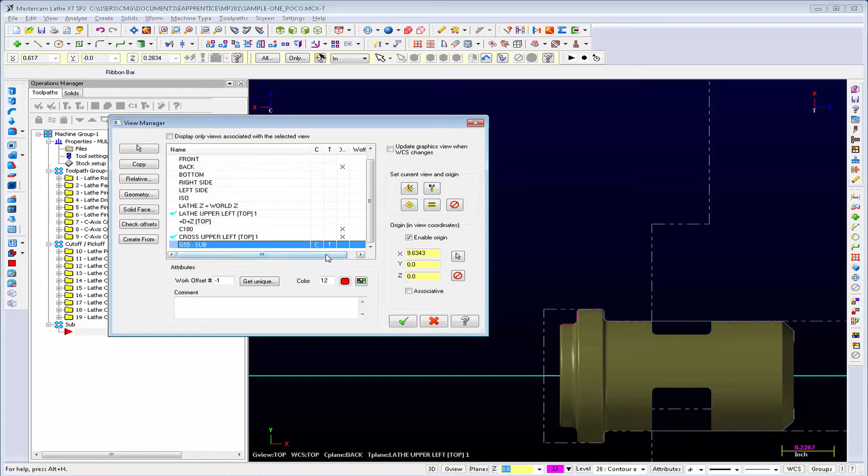Now we're going to do tool paths, rough, and oh, sorry, before we do that as well, save that, and we're going to go view manager. Okay, so now what I've done is switched my tool and construction plane to my sub spindle G55. If we go back into view manager you'll notice that it's basically at the back point of my chuck. So if I want to change the origin here, I can. You know, maybe I want it to be off the face of the part.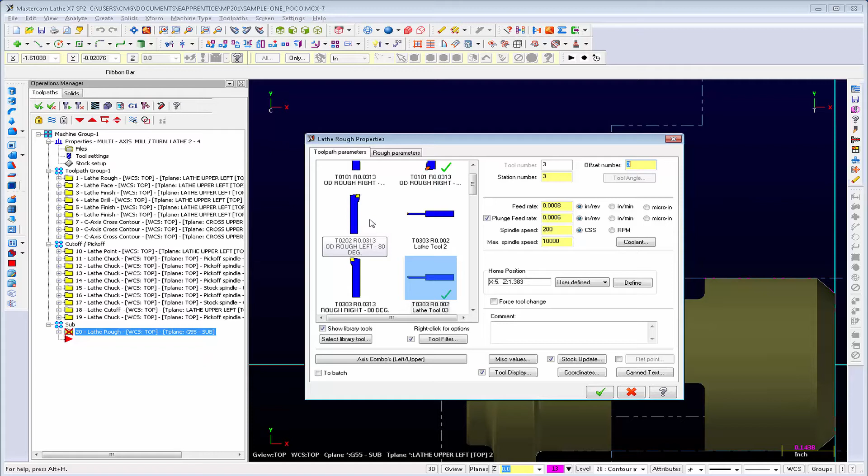Oh. That's not what I want. Okay, I got that set. So we're going to do a rough toolpath. Yeah, we're going to go there. Now, what's the first thing I need to do in here? It's a pop quiz test. Yep. Axis combo. Okay, make sure that you've got the right axis combination set up.

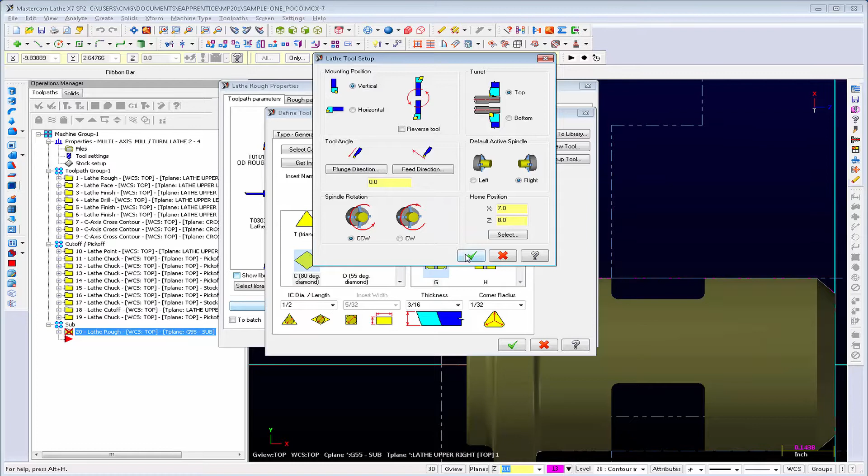And I'm going to turn off Show Library Tools. And there's my tool 0404 that I set up. I right click on it and I do Edit Tool. Okay, Draw Tool, set up right. If I go Setup Tool, right spindle, counterclockwise, top turret, vertical, the insert's facing the right way, the draw tool's facing the right way, I'm good to go. Now I go rough parameters, and choose the direction that we cut. We don't want to cut up and down, we want to cut left and right. So cutting method one way.

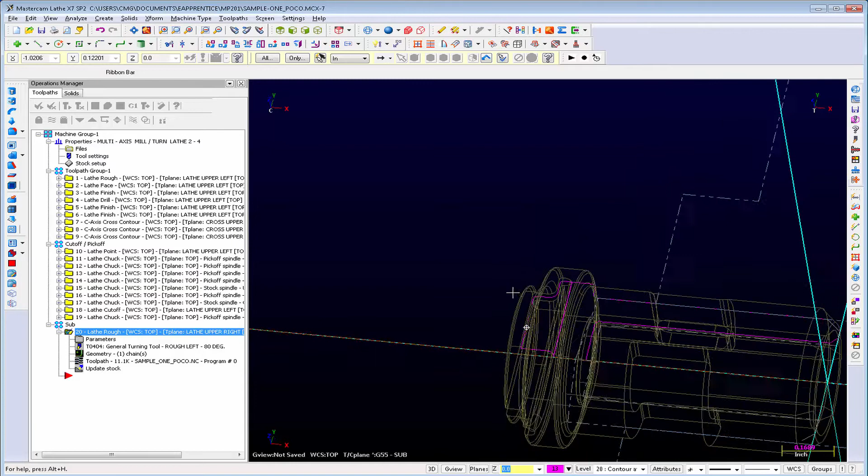Oh. What do we do here? Let's go disable stock recognition. Whoa. Well, that's a little funky. Wonder what I gave it for my geometry. Huh. That's not right. Left. How about no roll around cutters? Reverse chain for OD routine. Oh, for this? Really doesn't seem to want to do that very well, does it?

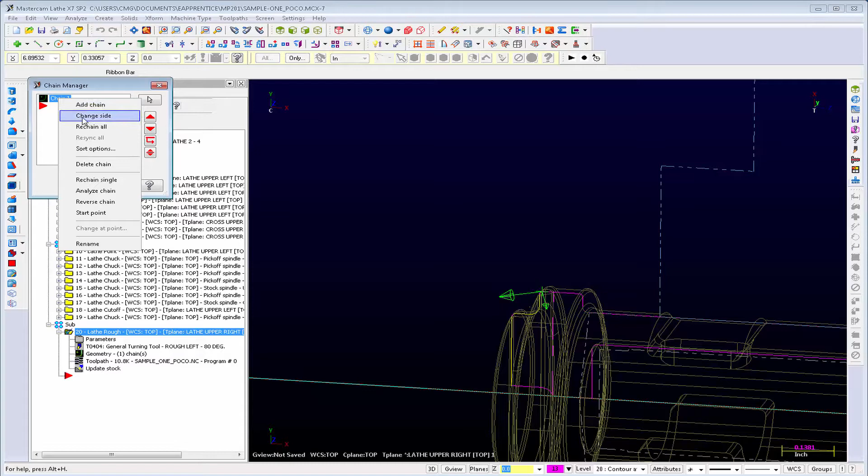Try changing sides, and let's make sure that that's on right. That looks good there. Well, that's interesting. All right, I can buy that.

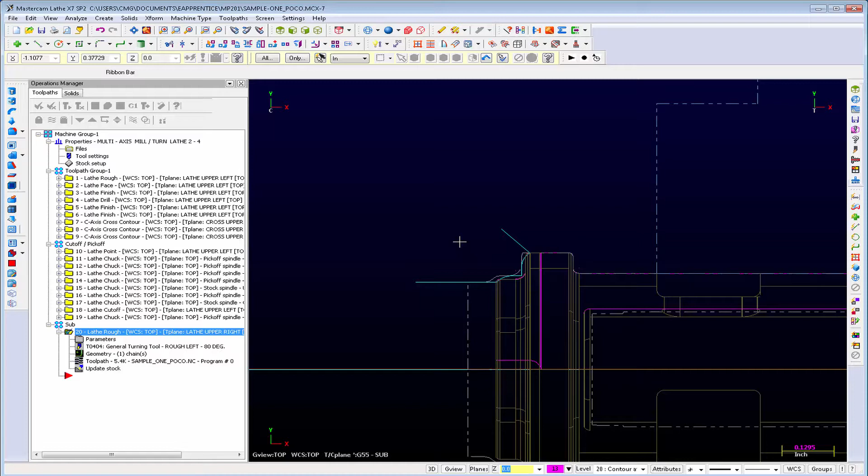Oh, and you know what? We also probably got to adjust our plunge parameters. Yeah. All right. We at least got some cutting on the right spindle. We can figure that out later. What I want to show you guys, because we're trying to wrap up class, is pmiscop_999. And what I'm going to do is copy that after regen.

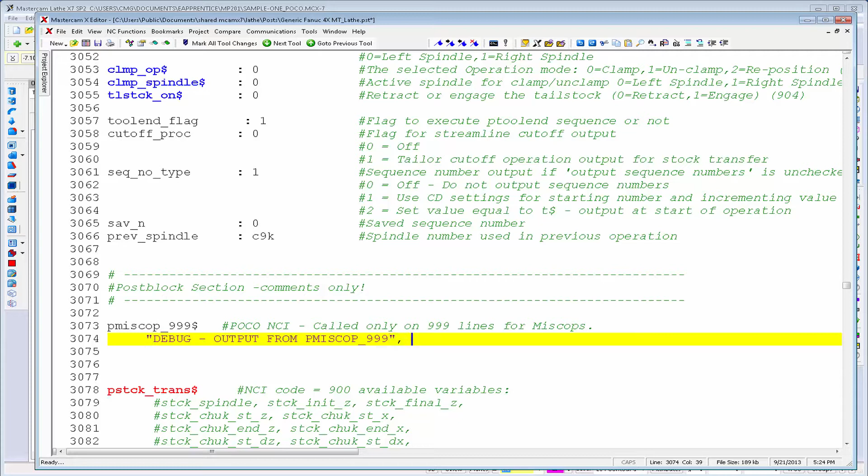Okay, so now we got a couple operations on the sub spindle. We got a bunch of operations on the main spindle. And what we're going to do here is in pmiscop999, okay, we're just going to output this statement. And then we're just going to repost this. All right. That real quick, and let's repost this.

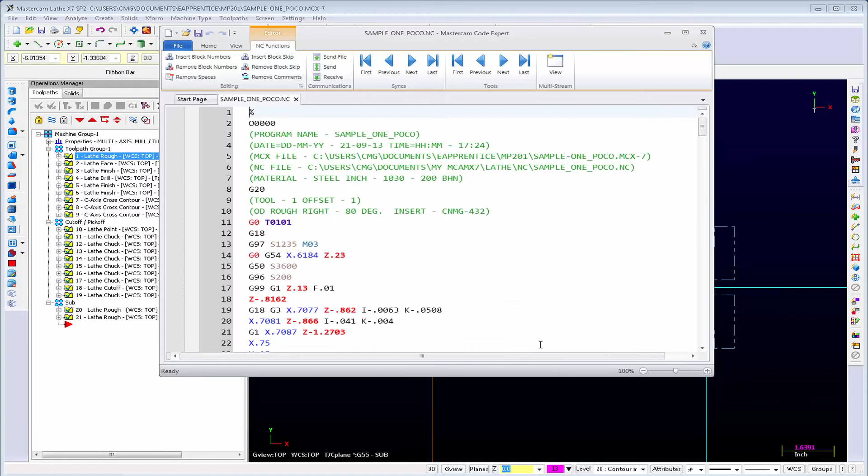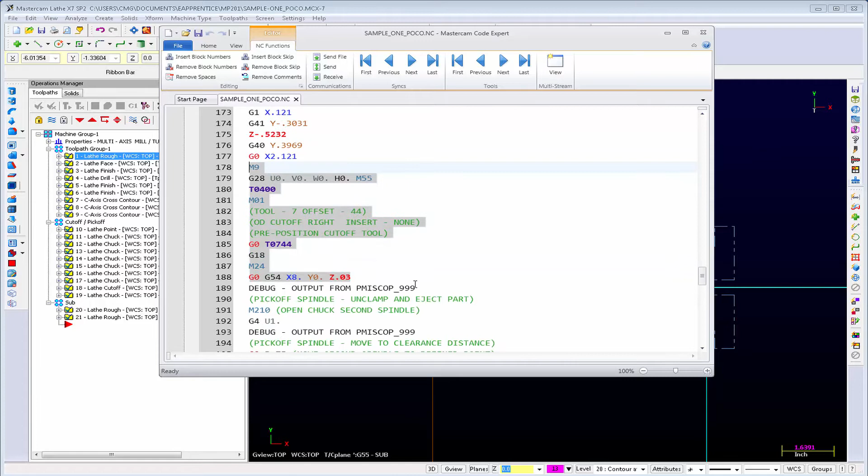So as we look through, there's first op, second op, third, fourth, whatever. Come down here. And what you can see is that we have our lathe point operation. So the pre-position is not included in the miscop 999. Okay? So there's no debug from there. But if we use some next variables like next op ID or next tool op, we can get some of those values to know what's coming next.

But here we've got the ability to set a flag here to say, all right, we've started processing POCO. And now this is all POCO, POCO, POCO, cut off the part, POCO, and then you notice that this debug output from pmiscop 999 happens before the retract here. So we can use that in order for us to set a flag to suppress the call to ptoolend, which is going to send your tool home.

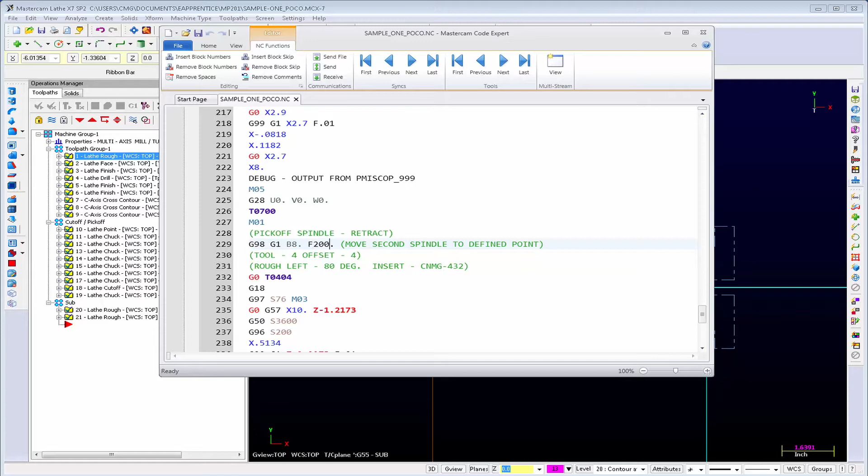And then after that's all done, after we move the spindle here, we can say, all right, in p chuck, we can basically look and see if we're at the next tool op, and then we'll add some code at the end here that says, all right, if the next tool that we're doing is not a chuck or a point or a cutoff operation, and a flag is set, then call p tool end.

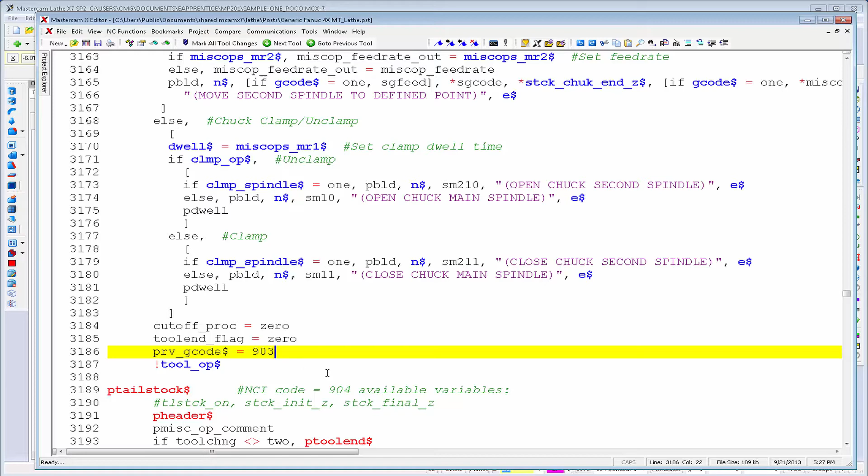And so the call to p tool end, what we'll end up doing is setting a tool end flag and making a call to p tool end, which will output the retract. So we're going to do that as an example. One of these nights, probably not this coming office hours, but maybe the next office hours after that. So we can look at doing all these little tips and tricks and making pick off, cut off work for us, making it do what we need it to do to run the machine.

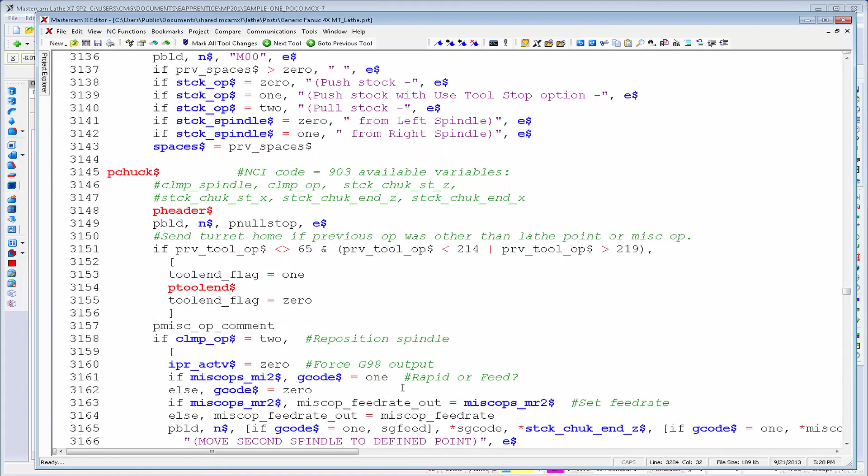So questions about what we've talked about so far in class? I know a lot of this is just kind of like, wow, he threw a whole bunch of stuff at me. I'm not even sure what to do with it yet. And that's okay, because we're going to be going through this together and looking at how do we use the tools that are in MP and in the language to customize the code to give us the output that we need for our machine.

Why is P-MISC op 999? Michael, it's P-MISC op. There's no S on it. Why is it undocumented? Because it's new. We have plans to document it, and part of the reason that we haven't is that we are currently going through the Generic Fanuc 4X MT lathe post, and we've got a project to add some default post blocks for spindle synchronization and spindle alignment, because those are two requests we get a lot of.

And just documenting P-MISC op 999 alone doesn't really get us much unless we add something and show how you can use it and do something with it. So it's not that we don't intend to, because we certainly do intend to document that. It's just one of those things that we haven't gotten to quite yet.

I think it works in X6. Don't quote me on that, but I'm pretty sure it works in X6. X5 only contained Poco as a prototype, so unless you had a license to run it, and mostly it was only developers that did, you're not gonna get anything from that. So I think X6 is the first version you can use the P-MISC op_999. Good question, though.